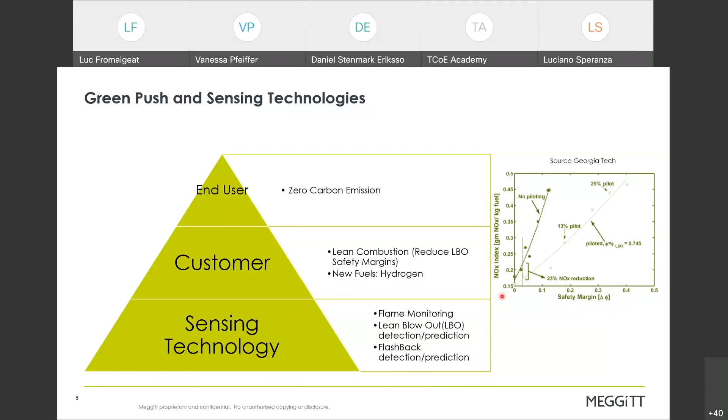How important the capability of reducing the safety margin is, is clearly shown in this Georgia Tech plot, where it's evident how reducing the safety margin here on the x-axis greatly reduces the emission of NOx. So we have two main ways to reduce the pollution. One way is to have a lean combustion. Again, the push comes from emission standards and also from operational savings, because we will use less fuel.

And going to lean combustion, we need to have the capability of managing the lean blowout condition, that is the condition under which the flame extinguishes because there is too little fuel. If we are able to manage the lean blowout, we can reduce the safety margin. As shown before, we can reduce the emission of NOx. But in this case, as we will see, we will need new sensing and data processing methodologies.

So lean combustion has the following challenges. It is detecting lean blowout and the better capability of monitoring flame instabilities. This is because we have a higher reactant flow velocity, and sometimes the reaction time is not able to keep pace with the mixing time.

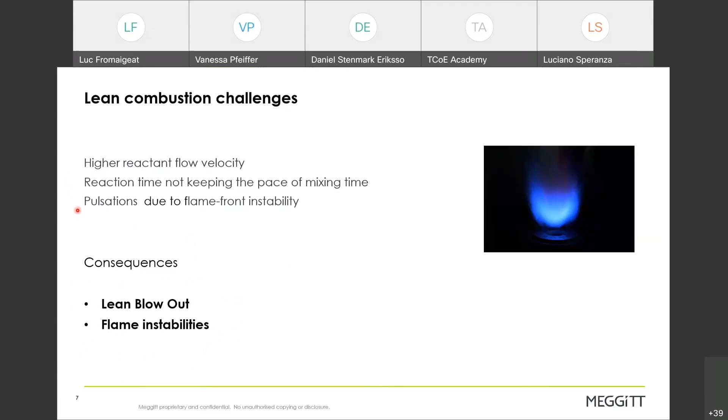About the hydrogen, again, the push comes from emission standard decarbonization. So we may go to partial or total hydrogen combustion, but in this case, the hydrogen combustion is more prone to produce flashback, and we need to detect or even to prognose flashback. So again, we have the requirement of having new capabilities in terms of sensing and processing the sensed data.

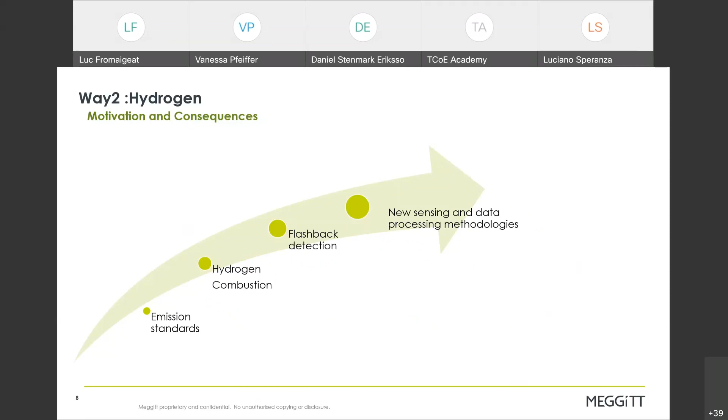Hydrogen combustion presents new challenges in terms of sensing and in monitoring and piloting the combustion itself. This is because we have a higher flame velocity, we have higher temperatures, and also the flame color changes from visible to IR. So the flame is completely invisible if we only burn hydrogen. So the consequences are that we have to be able to monitor flashback, to detect flame instabilities, and also to detect the flame, because as I said, it may be invisible.

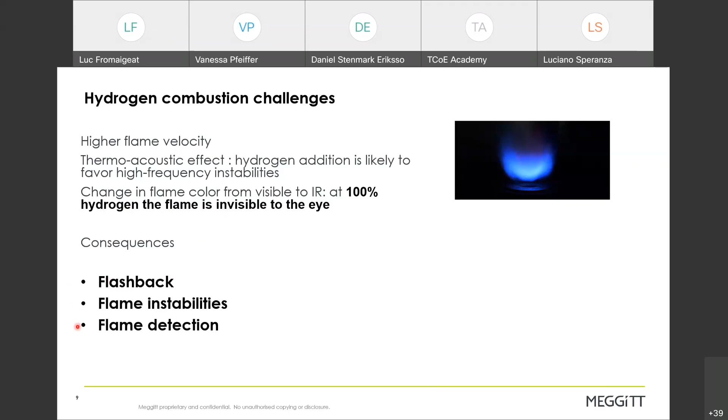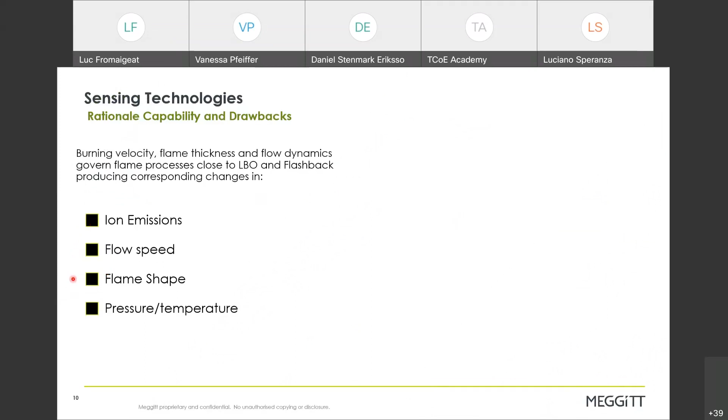In terms of sensing technology, nowadays technologies for controlling the flame are based on ion emissions, on the analysis of the flow speed or the flame shape, and also the analysis of the pressure and the temperature. So the main sensors are based either on chemiluminescence, or we can have also quantitative flow visualization made through particle image velocimetry. Sometimes high-speed CCD cameras are used in order to detect the flame presence and its shape, but more often it is the dynamic pressure sensors based on piezoelectric technology that are used in order to measure, as I said,

the pressure. All these sensing technologies have drawbacks, which may be related to maintainability or operating temperature, or response time in case of a CCD camera, and, as we will see more in detail, the signal-to-noise ratio at high temperature and low frequency for the dynamic pressure sensors.

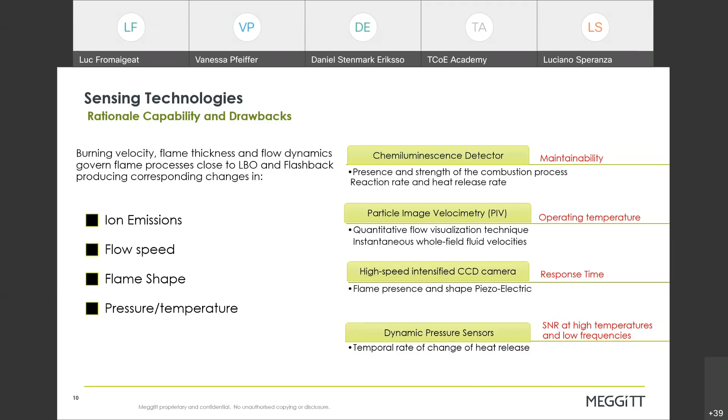Emission reduction poses new technical challenges to sensing systems inside the combustor. Most of these challenges can be effectively tackled by optical sensors. And here we're talking about the temperature aspect, reliability and sensitivity aspect, but especially all the needs related to flame health monitoring can be solved by the use of optical sensing systems because they do not have the low frequency limitation that conventional sensors have. Here you have a table, and we are going to discuss all these points during the explanation of the result of our test campaign.

So let's talk now about optical sensing, what it is, how it's done, and what are the principles that are behind the optical sensing system. First, I want to give you an idea about the Meggitt positioning about the optical sensing technologies. We know that they are quite well developed and deployed in the medical environment. And about the power generation and also the aerospace, there is an ongoing transition from the research to the implementation of in-service assets, as it is the case of our optical sensor.

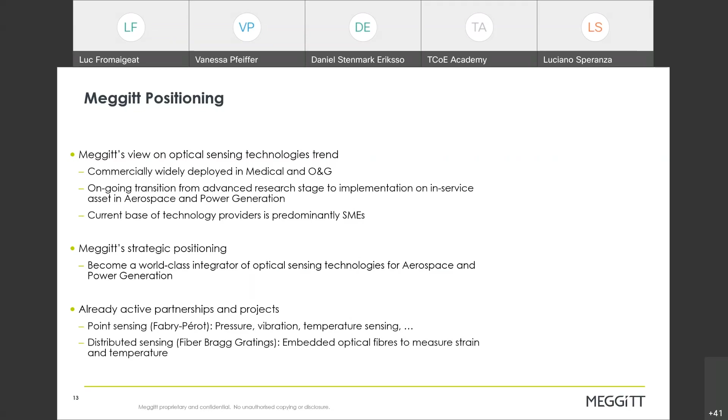The Fabry-Perot interferometer which has been used has some peculiar characteristics. So, a Fabry-Perot interferometer is essentially a cavity where on the two sides we have mirrors; one of the mirrors is attached to the diaphragm in such a way that the cavity size may change when we have more or less pressure or a change in temperature.

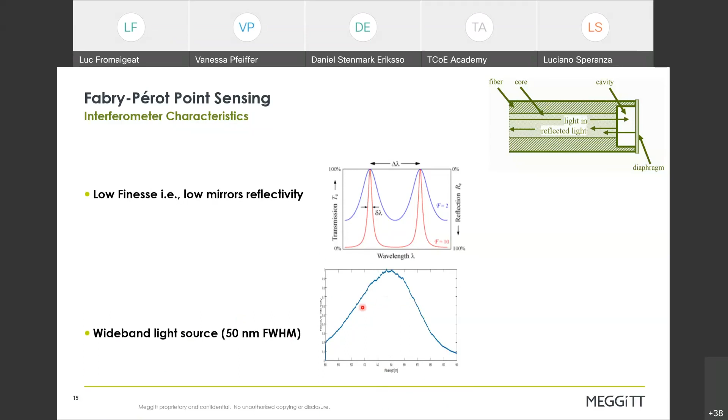As mentioned before, the Fabry-Perot interferometer is essentially a cavity made by two reflecting parallel surfaces. Here, the reflected light is modulated in frequency as a function of the cavity size. Why does this happen? This happens because at every reflection the phase of the ray increases by delta, where delta is determined also by L, where L is the dimension of the cavity itself.

So in the end, we have a reflection coefficient which varies with the wavelength lambda, which produces a modulation of the kind that we showed already. In this case, we have a low finesse Fabry-Perot cavity. In this case, we have a high finesse Fabry-Perot cavity. And the finesse is linked to the reflective coefficient R by this simple equation.

This sensing technology presents several advantages with respect to the other sensing technologies we presented before. We have an improved sensitivity and accuracy, especially at low frequencies. We are inherently insensitive to EMI perturbation, because we do not need to have electric signals inside the sensor. It's also inherently safe. We have a small size. It can be used in a multiplexing architecture, and especially, underline especially, we have multiple sensing capabilities.

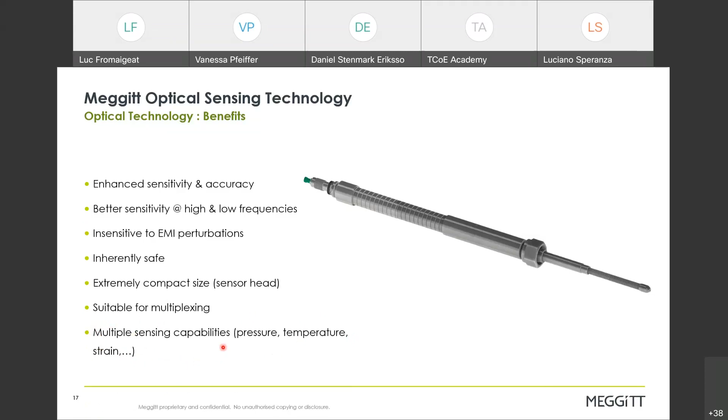So we showed that the light modulation happens as a function of the size of a cavity. And this means that the measured spectrum we receive in the interrogator contains essentially the information of the gap dimension, and any physical quantity that modifies the Fabry-Perot cavity dimension can then be related to the reflected spectrum. And so any physical quantity can be measured if we measure the size of a cavity.

And this means that we can use Fabry-Perot sensing for dynamic pressure, but not only, also for static pressure, for temperature, for displacement, for vibration, etc. Now that we have seen the basic principle of Fabry-Perot sensing, I'm going to describe the Meggitt sensor.

As we have already seen, for the Fabry-Perot, we have essentially two parts. One part is the sensor itself, that stays in the hazardous area. And the other part is what we call the interrogator, which contains an optoelectronic module and some data processing algorithms. And then the result coming out from this system can be used to have more sophisticated monitoring algorithms that we are going to describe a little bit in the final part of this presentation.

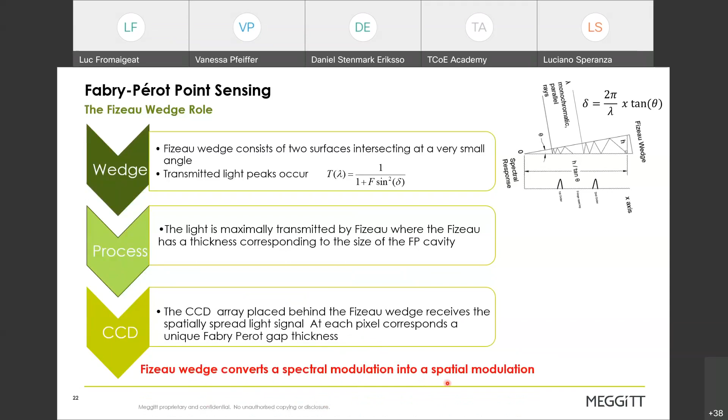This means that on the CCD array which is behind the Fizeau, detecting the peak of the light, we can determine the size of the Fabry-Perot cavity. So substantially, the Fizeau wedge converts the spectral modulation provided by the Fabry-Perot into a spatial modulation.

Now we want to summarize the two main math relationships from the optical point of view, of course. So we have an equation which deals with the Fabry-Perot reflectivity, which says that the reflectivity is a function of the wavelength, of the finesse and the path delay. And we have a second equation which determines the wedge transmissivity, which is again a function of the wavelength and again depends on the finesse, but this time the finesse of the wedge.

When Meggitt started thinking about optical sensing, the main goal was to improve the piezo performances. Especially, we were focusing on the fact that piezo does not give very good results for frequencies lower than 50 Hz at high temperature. More, we want to be immune to vibration and to EMI. So these are the initial goals of designing an optical pressure sensor.

And this table summarizes the main characteristics of the optical sensing system. So you have described here the dynamic pressure range, the frequency response, which goes reliably from 2 Hz to 20 kilohertz, the precision, and the accuracy, which outperforms the accuracy provided by the piezoelectric sensor.

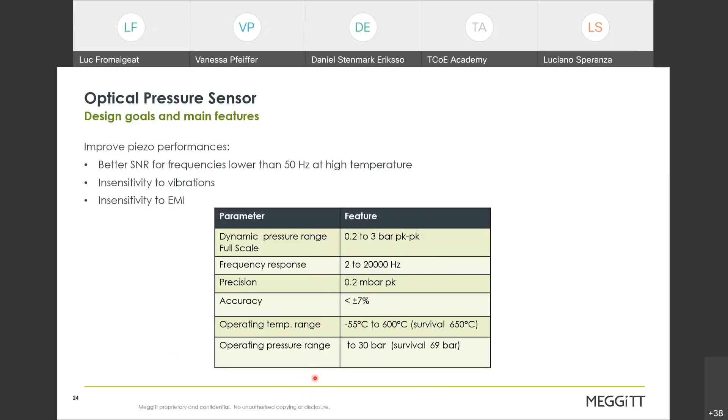The operating temperature range goes to 600 degrees, but activities are in progress in order to change materials and to go to temperatures as high as 800 degrees Celsius, and the operating pressure range is up to 30 bar.

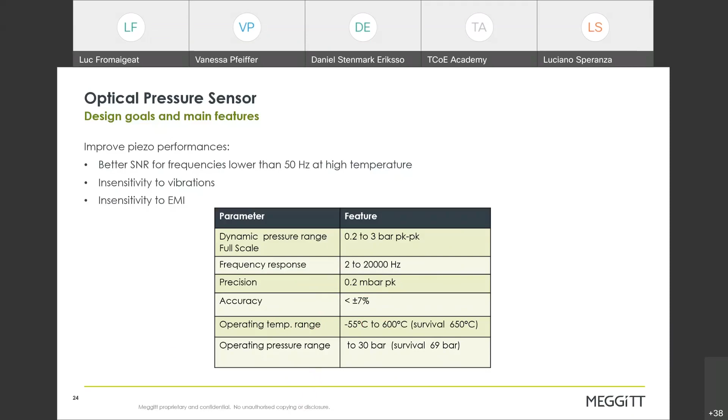So once we completed the design, it was time to make this match, optical versus piezo, that I'm going to describe next. We knew very well that piezoelectric sensors had low frequency limitations. Low frequency, we'll see, is very important to detect lean blowout and flashback. What we knew is that the increase of temperature causes a drop of the sensor resistance, which in turn determines a significant increase of the noise level, but especially masks the behavior at low frequencies.

So we decided to design a test campaign in collaboration with Graz University, in order to compare the optical system with its piezo counterpart in several realistic scenarios representative of gas turbine combustion. This has to be done in a controlled, precise, and repeatable manner. We wanted to know exactly what we were doing within the combustor. And we focused on several aspects, which are listed here, which go from electromagnetic interference to the perturbation due to vibration, and to the detection of events like ignition, flashback, change in regime, and lean blowout.

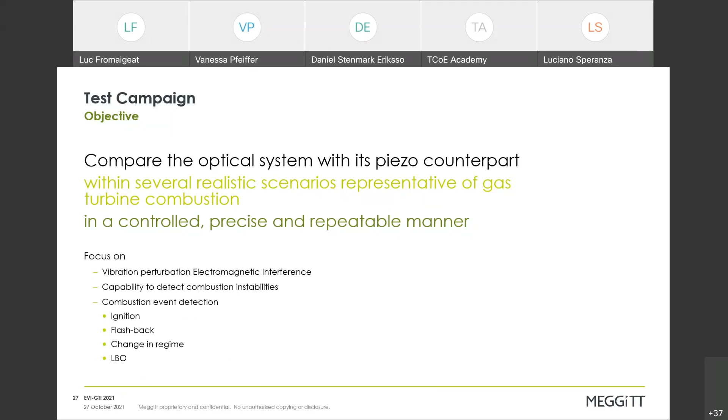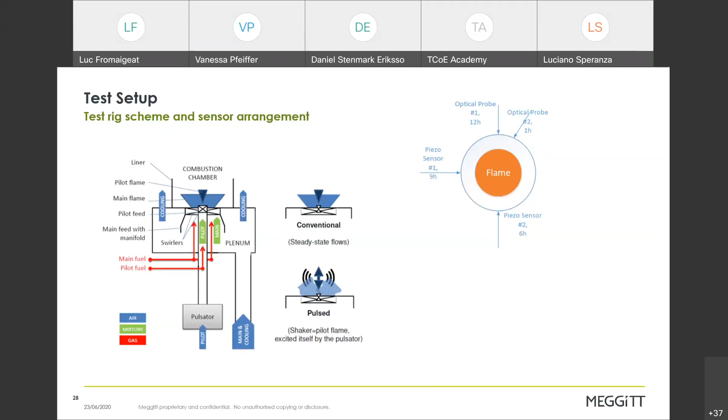The test setup was done in such a way that we have in the combustor 2 piezo sensors and 2 optical probes, and we can also produce different conditions in the combustion, using also a shaker to do what is called the Koelner Dom experiment. We did cold flow and hot flow experiments. This table is related to the hot flow experiments, which are more interesting for this presentation.

So we tested the behavior under ignition. We tested the detection of a flashback, the transition of a flame from premixed to diffusive. We analyzed the combustion instabilities, and also we analyzed the signal in proximity of lean blowout.

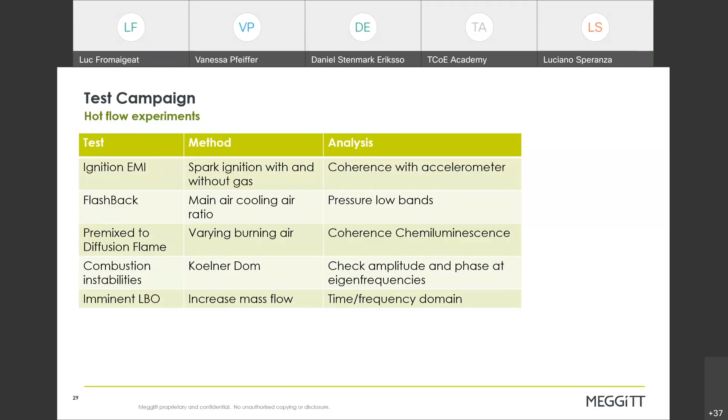This is the Koelner Dom experiment. So with the shaker I showed before, we produce combustion instabilities, and both the optical sensor and piezoelectric sensor showed good agreement in both amplitude and phase response. This test was quite important also to analyze the phase measurement, because in some circumstances it is very important. So we could show that optical data have good enough quality to make a measurement of phase, as the piezoelectric sensor has.

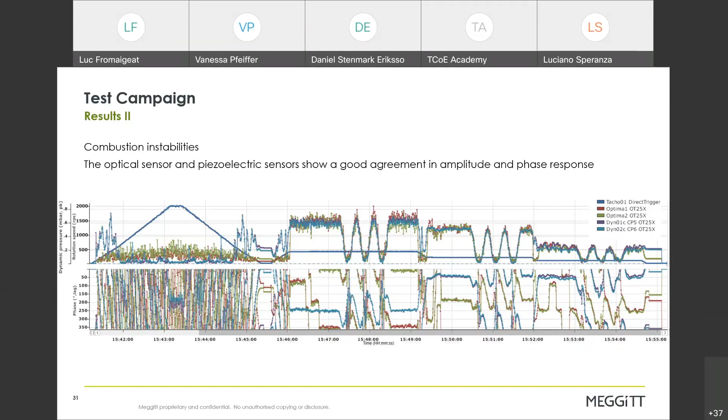As said, we cannot do this analysis with piezo. And so this proves that we can have a more reliable, physically meaningful analysis of a flashback. And probably the low frequency band analysis may also help to identify flashback precursors, which are very important, as I mentioned, for hydrogen combustion.

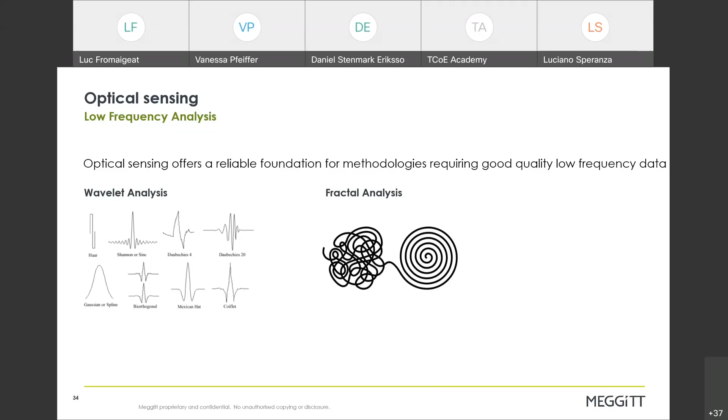Results of this analysis and a little description of the algorithm are also presented in another document that we presented to the PHM conference this year. And I will give you the reference at the end of this presentation.

So as I mentioned, we developed some wavelet indicators for lean blowout. We focused on lean blowout at that time. We are now ready to analyze also the signals in proximity of the flashback.

So we have two different wavelet indicators that we developed, and here we show the value of these wavelet indicators, which we called hard indicator and soft indicator, in proximity of lean blowout, and we can see that the first one clearly detects the event, and the second one also gives some hints about the approaching of this event.

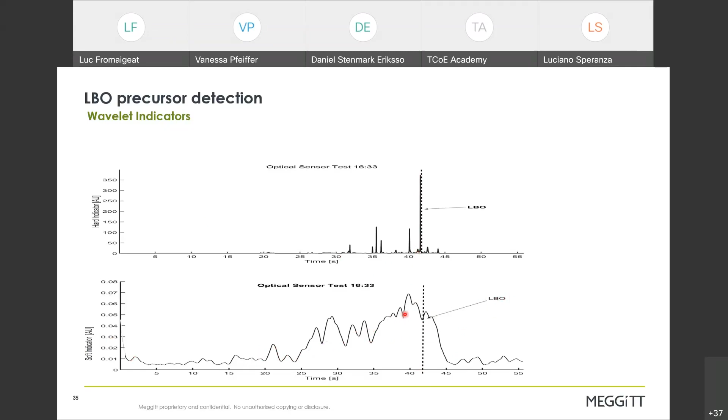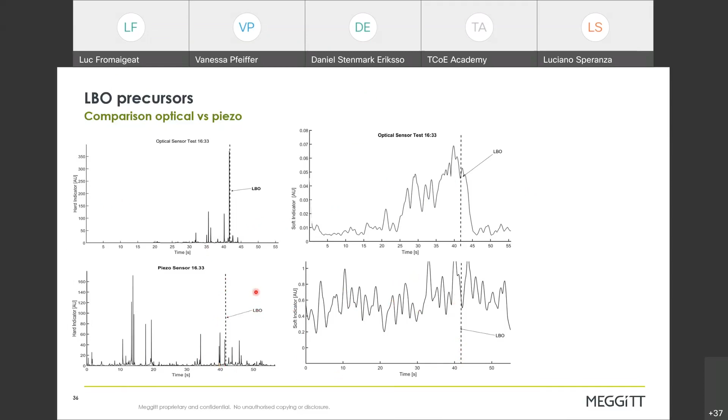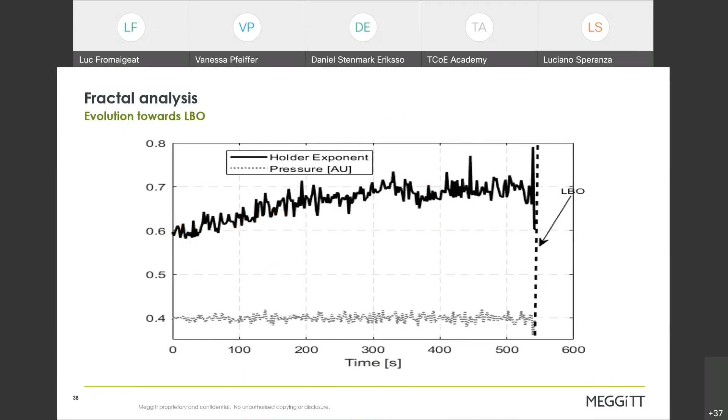Okay, this is another one, and again we have this increase from normal combustion, from 0.6 to 0.7. And these are other events. Again, we did the same experiments, increasing the air flow, and again we go from 0.6 to 0.7. So it looks like quite a reliable method to prognose and track the evolution towards lean blowout.

Of course, we repeated the same analysis for the piezoelectric, but as shown for the hard and soft wavelet indicators we described previously, again, we cannot use the low frequency data, which are crucial for the determination of the Holder exponent.

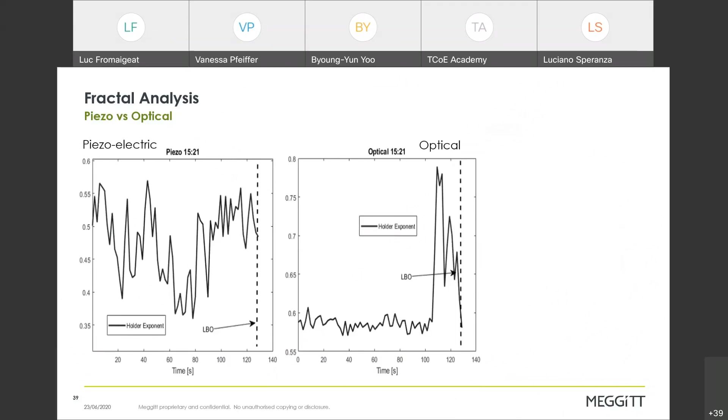So we can move now to the conclusions. I want to recap here the sensing system. It's made of two parts: a sensor with an interferometer in the combustor chamber and some electronics to analyze the light returning from the interferometer, transform with the Fizeau wedge the spectrally modulated light into spatially modulated light, and extract the pressure.

So two parts, optics and electronics, and two interferometers, the Fabry-Perot and Fizeau. Moreover, in the end, it's not truly white light. We saw that we have 50 nanometers of light at full width, half maximum.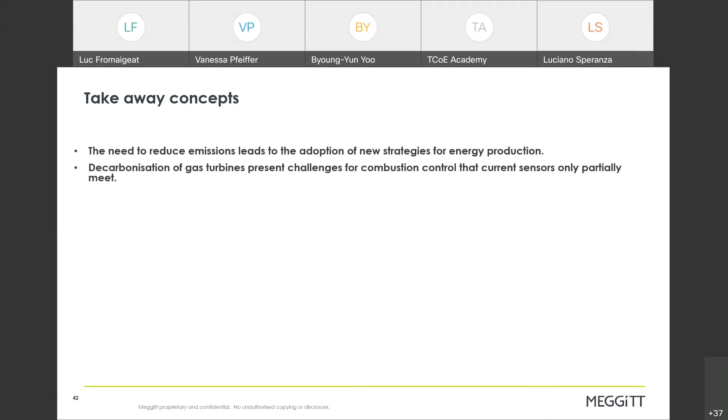And these are the concepts I would like you to remember. We started with the need of reducing emissions. So we need new methods to produce energy, new methods to control the combustion. And optical sensors have very good characteristics. They can withstand higher temperatures, they are insensitive to EMI, and they have a better signal-to-noise ratio.

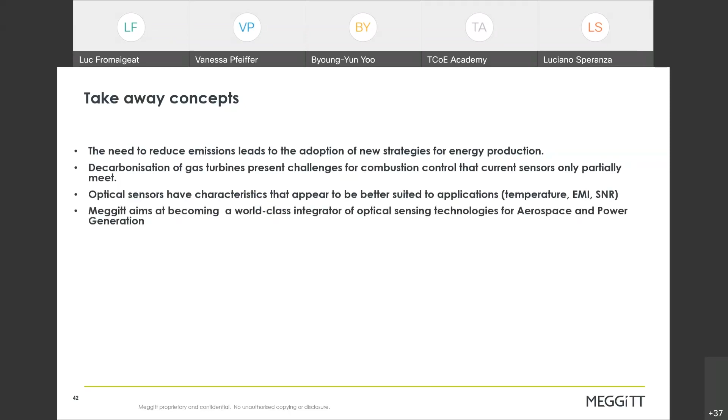Meggitt has invested in this new technology and wants to become a world-class integrator of these sensing technologies for aerospace and power generation. We presented our system solution for dynamic pressure measurement, which is based indeed on the combination of two interferometers and a signal processing algorithm. Those are secret, and I didn't mention them.

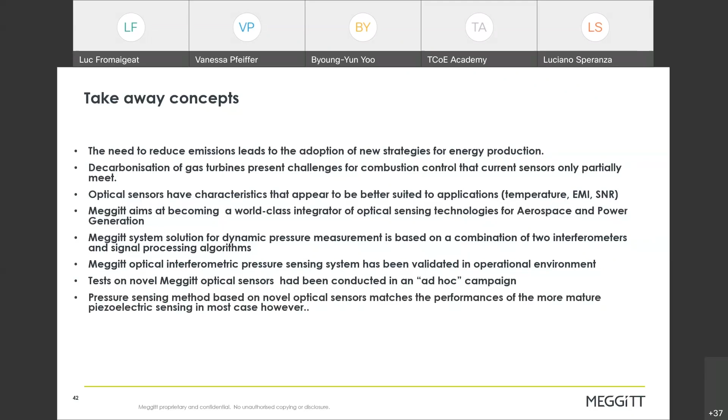And we presented also the results of the tests we made to validate the optical sensing system in an operational environment. We made this ad hoc campaign, which allowed us to confirm that we have very good results, especially at low frequencies. In the rest of the cases, the optical sensing system and the piezo sensing system are almost equivalent, but remember that we have a higher signal-to-noise ratio at low frequencies.

And this provides a reliable foundation to monitor phenomena such as lean blowout and flashback, that are critical to transform the gas turbine into a low or zero carbon emitting system. And this is where the hummingbird comes into play.

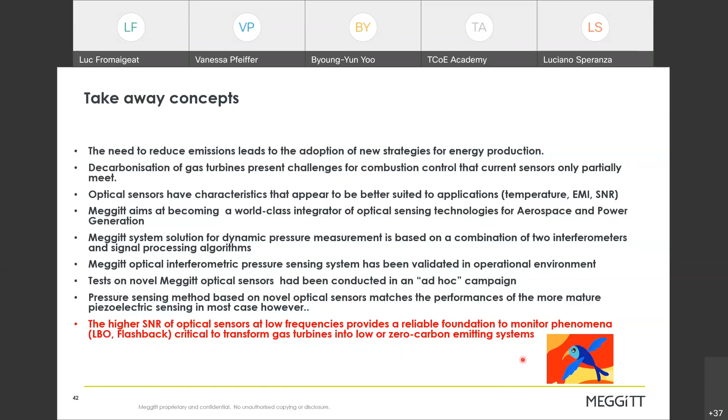I want also to give you some idea of the current development. We made tests on turbines with optical dynamic pressure sensors since the first half of 2020. We expect to have an industrialization phase completed by the end of this year and entry into the market in 2022. On the aerospace side, we are also developing new high temperature static pressure and temperature sensors. And we will have a second engine test in the first half of 2022.